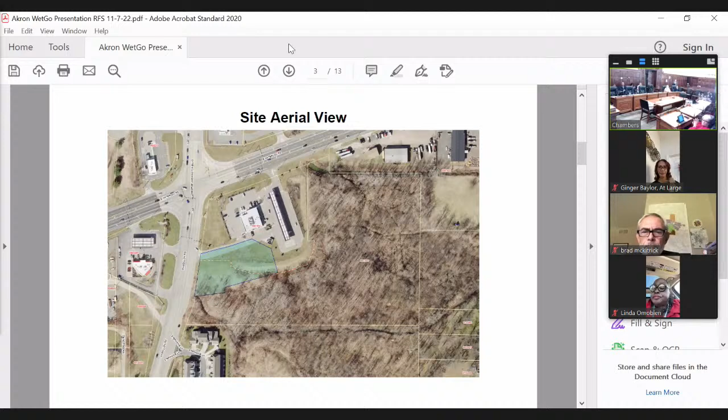This shows the existing GetGo, the C-store closest to the corner. The long rectangular structure is the canopy. What's shaded in blue is the area where we'd like to add the automated car wash facility.

We can go to the next slide. I should also point out some of the environment around here. It's forested or undeveloped to the east and to the south, and beyond that to the south is some multifamily residential. The other corners of the intersection are all commercially developed.

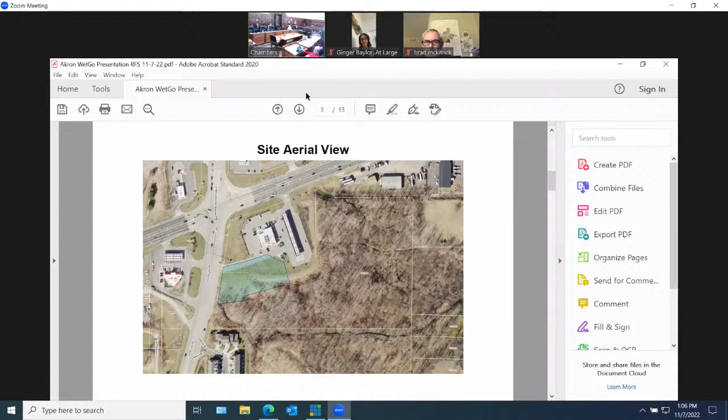The next slide is kind of just an overview. I think Mike hit most of these. I just want to point out, we'll look at the site plan, but we have 2 queuing lanes. There's 14 vacuum spaces for self-serve vacuuming, and then we have 6 regular parking spaces for employees, or maybe a service technician that wouldn't want to park in a vacuum space. We have some general spaces.

Our refuse container, or dumpster, is screened to match the adjacent one at GetGo. This property is about 1.3 acres, and the car wash building is a little over 3,500 square feet.

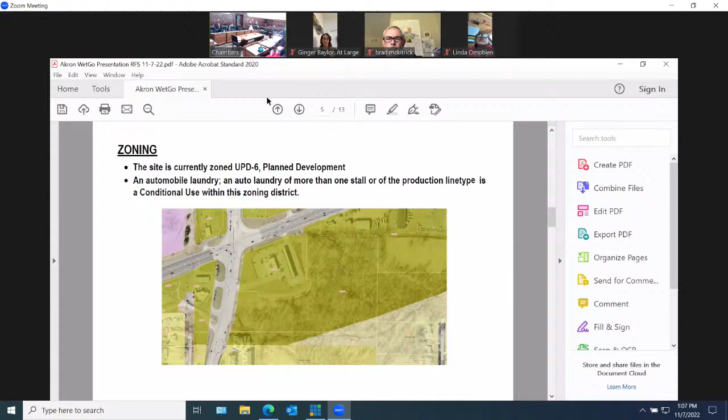On the next slide is the zoning, which we've already touched on. The next one is really all the statistics for this development, more of the bulk table for the zoning. I won't read all these, but I'll just note that we're not seeking any variances for the development. We can meet the zoning requirements.

What goes across the upper left corner of the site, we've called it George Washington Boulevard, but I believe it's Massillon Road. Across the top of the page is where the existing entrance to the GetGo is. We plan to just share that same entrance and not create a new curb cut, so you can enter the car wash site or go to GetGo from that same access.

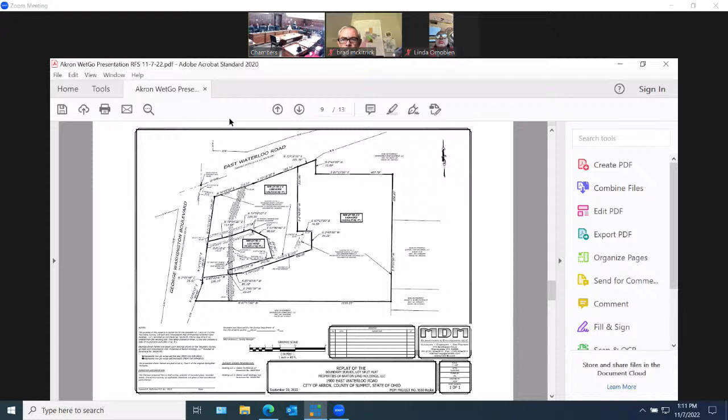On the next slide, we finally have some color here. We have some building elevations. I've got to pull my glasses out. Let me see here.

So the top one is the entry side to the car wash, and the bottom elevation is for the exit side. We vary the height of the building just to give it a little more character. There are also some variations in the depth, so it's not a simple rectangle, to kind of enhance the building.

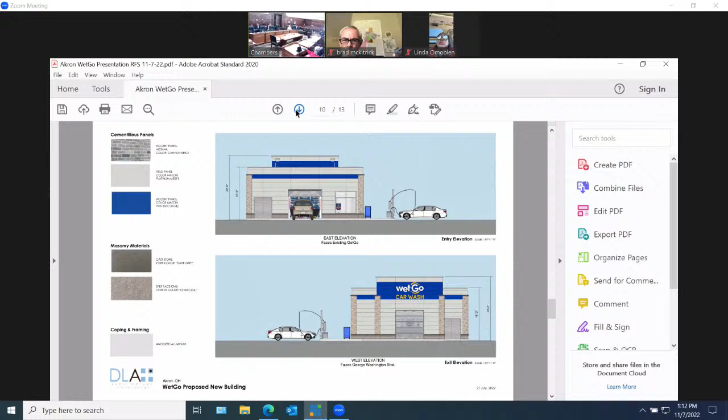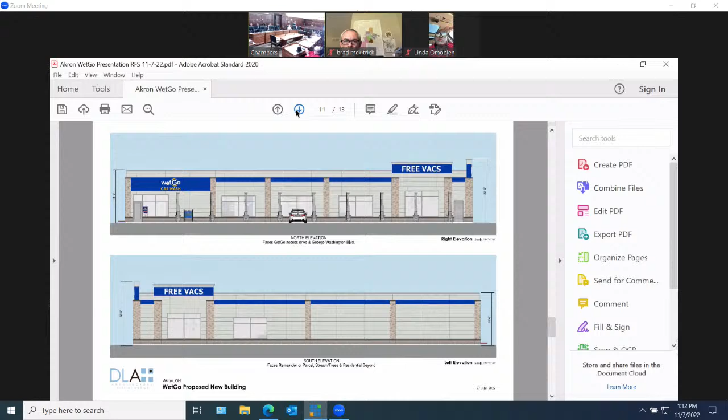The next page is the longer side elevations, where on the side facing the GetGo, we'll have windows where you can see a car go through the wash. The back side facing the queuing of the vehicles has a few windows, but it's more the mechanical side, so there are fewer features to show there.

The next slide is the landscaping for this site. I know it's a little hard to read from this perspective, but staff has given some input. And the last one is the photometrics, where we're meeting the lighting code for the city.

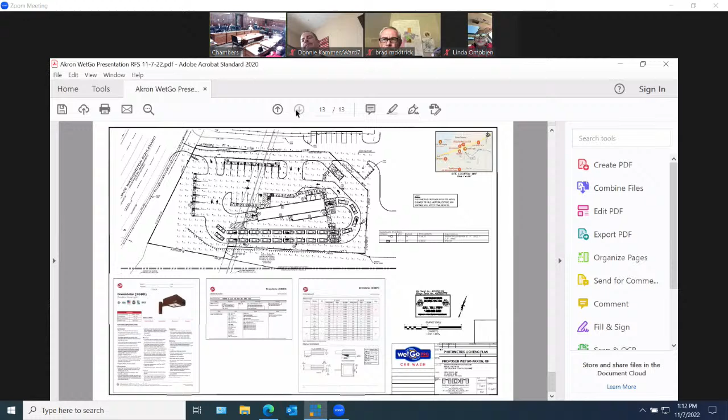That is a real quick run through. If we'd like, we can go back and discuss any portion of that in greater detail, or if there are any other questions I might be able to answer. Very good, thank you, sir. Thanks, thank you for attending.

Is there anyone else who wishes to speak in favor of the conditional use request for car wash on George Washington? Anyone else wishing to speak in favor? Anyone wishing to speak against? Very good, we'll close the public hearing portion of this and open up to questions from the committee.

Ms. Mosley? Thank you, a few questions for you. There's another car wash that sits in close proximity, Soak City Car Wash. So my question is, how do you think your business will prosper with Soak City being so close in proximity?

Well, it is a competitive world, so we think we offer an awesome car wash experience. And another thing, I think this is important, is that we have the Giant Eagle supermarkets, we have the GetGo convenience stores, and the WetGo car washes.

And there's a seamless perks or loyalty program between them all. So when you purchase any item at any of the locations, you earn points, so you get free gas or free food, or you can apply it to car washes. So I think it's the loyalty of our customers.